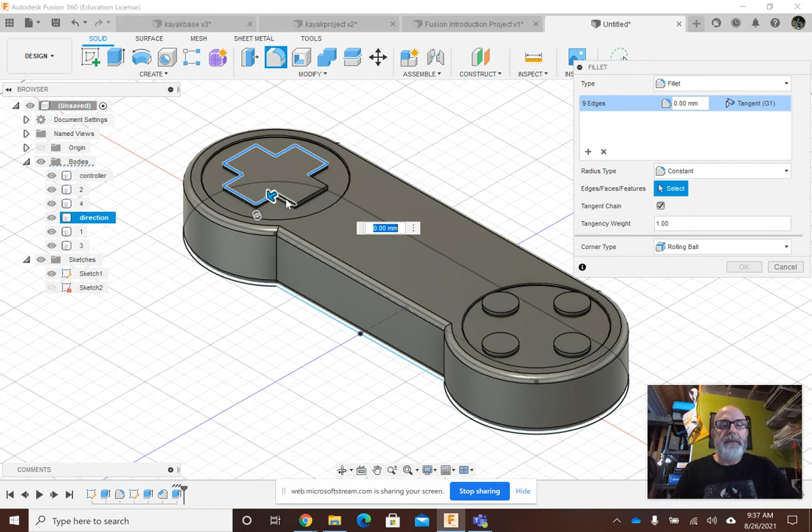Brings up my fillet palette, and the active section is to select the edges that I want to apply the fillet to. So notice there's a bottom and top edge. I want the top edges of this button. So that's what I want to select. We need to be precise here. Click, click, click. Missed one. Click, click, click. Top. Make sure you're at the top. Click. All right, so I got that button selected.

Let's go over here and get these, they will be easier. Click, click, click, click. I can do both sides because they're all going to receive the same fillet of 1.5 millimeters. So let's type in 1.5 in our dimension box. It projects out what the fillet will look like. Yep, there's our rounded edges on them. Looks good. Click OK. The fillets are applied.

Last thing we have to do is to create our AB buttons here in the middle, and we'll be done. So we're going to create a sketch on the top surface of our design, and we'll add those buttons. So let's go over here, create sketch. Now, before I get there, the thing I want you to notice real quick, look down at our timeline. All of our steps are being recorded, and we can go back and access those steps at any point in time if we need to change something. Our designs are flexible, dynamic, and we can go make modifications if we need to.

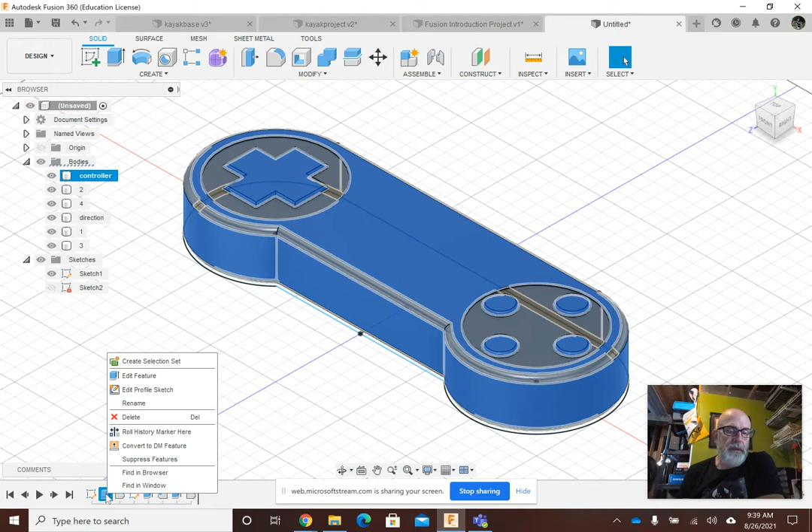All right. So if I wanted to go back and change the height that I extruded the initial body, I can go back on the initial extrude, right click, or you can double click on it, edit feature, and I could change it from 38 millimeters to 50. Click OK. My design adapts to that change. Okay. Makes our design very flexible. Let's go back and change it back to 38. Right click, edit feature, 38 millimeters. Okay, just wanted to point that out.

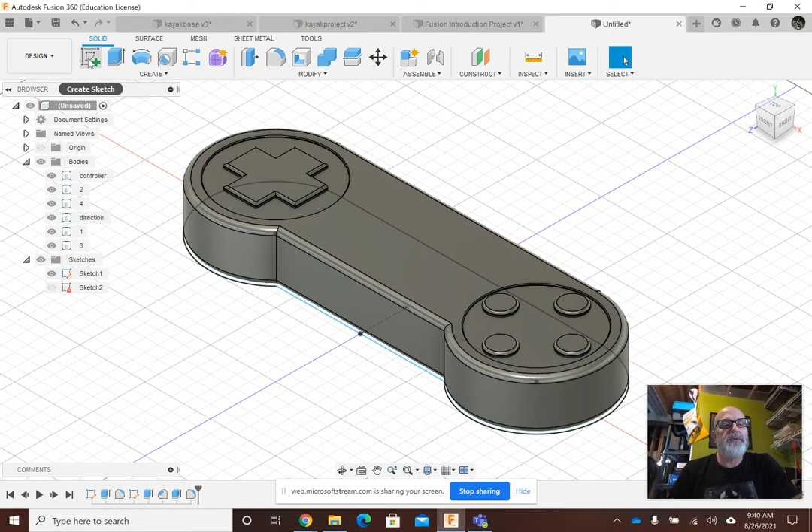The timeline is a tool that we will use a great deal in this class. Don't be confused when I say go to the timeline. All right, what were we doing? Oh, we're going to create a sketch on our top surface and put our AB buttons in. Create sketch. Remember, don't overlap with one of the planes. So I'm going to click up here, click, and there we are.

Now, the first thing we have to do, and I'm going to move mine over so it's visible, is we need to position where our AB buttons are going to be. And it's going to be based on the origin here, the center of our design. Escape out of my hand tool. So I'm going to draw a center rectangle because I want my buttons to be 25 millimeters down. And was it 25? No. I want it to be 12.5 millimeters down and 12.5 millimeters over.

So I'm going to draw a center rectangle. I'm going to turn construction on, from the origin. Click. I'm going to draw a 25, tab, by 25 millimeter square from the origin and hit enter. So it's 25 millimeters from here to here, which means it's 12.5 millimeters from the origin to the bottom line and another 12.5 over that direction. So these two lower corners represent where I want my A, B buttons to be.

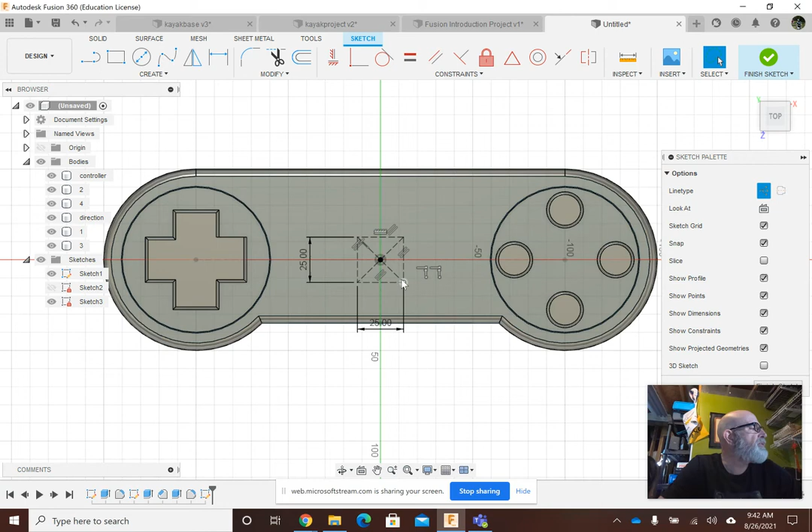And to draw these buttons, because they're kind of an oval shape, they're not circles, I'm going to use the ellipse tool. Okay, the ellipse tool is 3 clicks and it has 3 dimensions: the height of the ellipse or the length, the width of the ellipse, and the degrees in which it's being drawn at. Is it going to be straight up 90 degrees or is it going to be slanted over one direction or another?

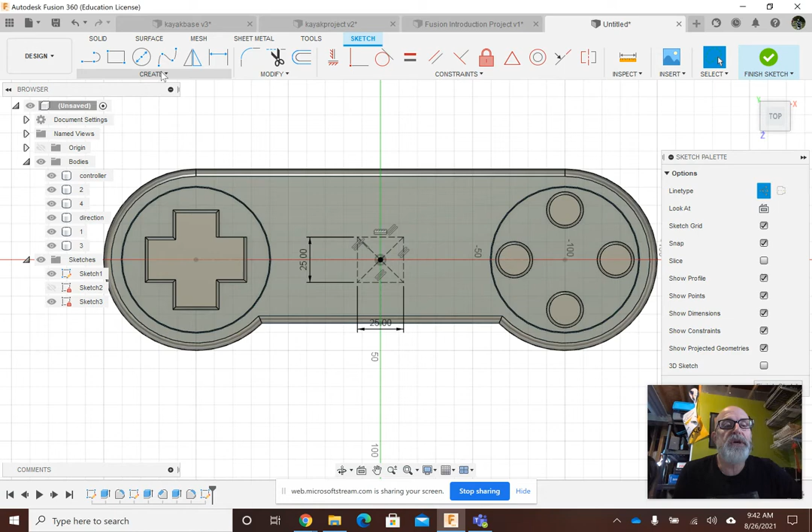So I'm in the sketch mode. Notice I'm back to the sketch menu. Create ellipse. Okay, ellipse. Click. I'm going to zoom in, make it easier to see here. I'm going to come down to this bottom corner. This is my first click on the ellipse. Click. I'm going to drag up.

I want my ellipse to be 20 millimeters long. I'm going to hit the tab key and I want it to be at 100 degrees. All right, so I've set those.

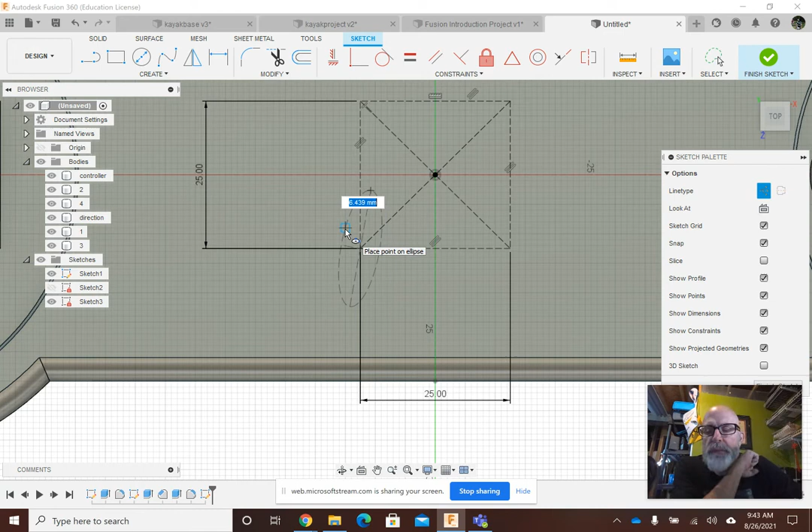Click again, now drag left. Notice how my ellipse starts to form. I've got a problem though - I didn't turn off construction and I want this to be part of my design. But I can fix it.

Let's go ahead and put our ellipse in at 8 millimeters wide and hit enter. So there's my ellipse, but it's construction, so it's not an enclosed shape. It won't enclose for me.

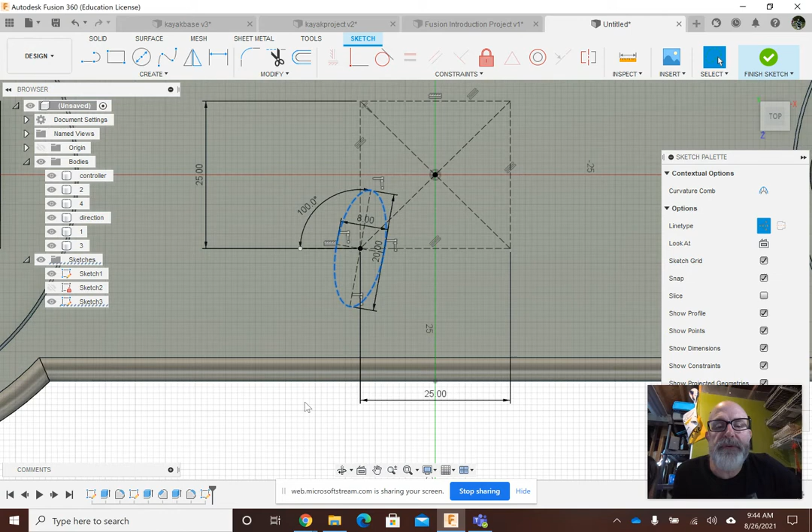Let's select the line. Notice how it turns blue when I click on it - it's selected. Let's go over to my line type and deselect construction. Now it's no longer construction.

Let's turn it back on because I want to show you another way of turning it on and off. Select the line, hit the X key on your keyboard - it deselects construction.

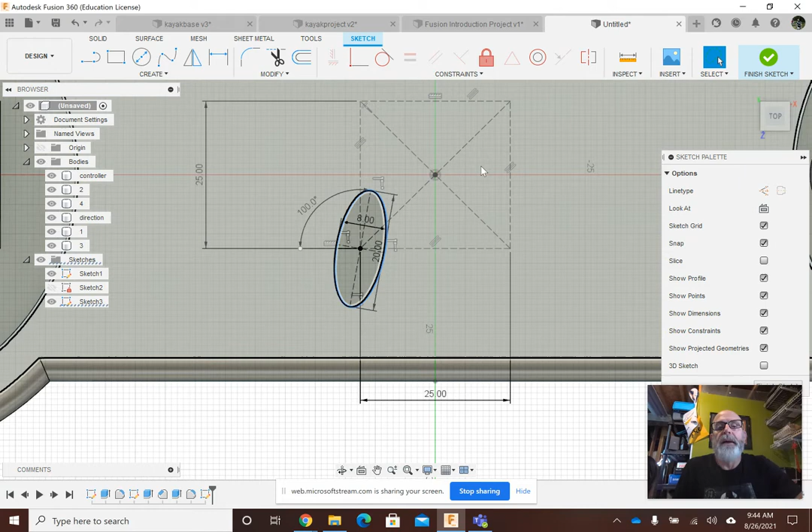Now, I could draw this again from this corner, or I could use the mirror tool to create an identical ellipse on the other side of the axis. I have multiple options in how to do this.

We'll just draw the ellipse again. I've got construction off, good. What I'm trying to demonstrate by saying that is there are multiple ways of doing the same thing. I'll tell you what, let's do the mirror tool.

All right, let's go mirror. Object selected, there we go. I already had that highlighted, so click on it. Select your ellipse, the mirror line - what line do I want to project it on the other side of? Oh, it's not going to let me select the axis, so I have to draw a mirror line.

Let's cancel, let's go to my line tool. Make sure construction's on. Start at the origin, come right down the y-axis. That's good, there's my mirror line. Escape out of the line tool.

Let's go back to mirror. Select your ellipse as the object to be mirrored, and my mirror line - it's going to project it on the other side of this mirror line. There it is, select it. No, that's not right, I want it tilted the other way. Cancel, not going to work.

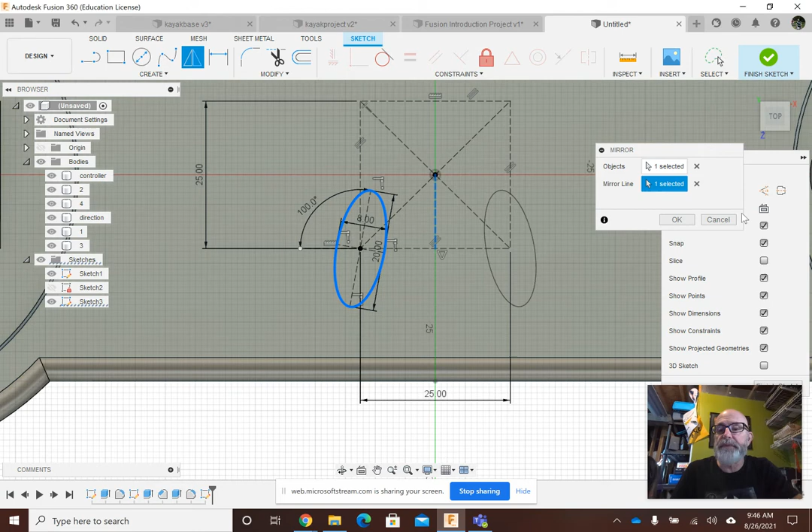All right, it's worth a shot - I hadn't tested that beforehand, obviously. So let's go to our ellipse tool. Let's go to the bottom corner here. Click, start to go up 20 millimeters on my length, tab 100 degrees. Click again, 8 millimeters.

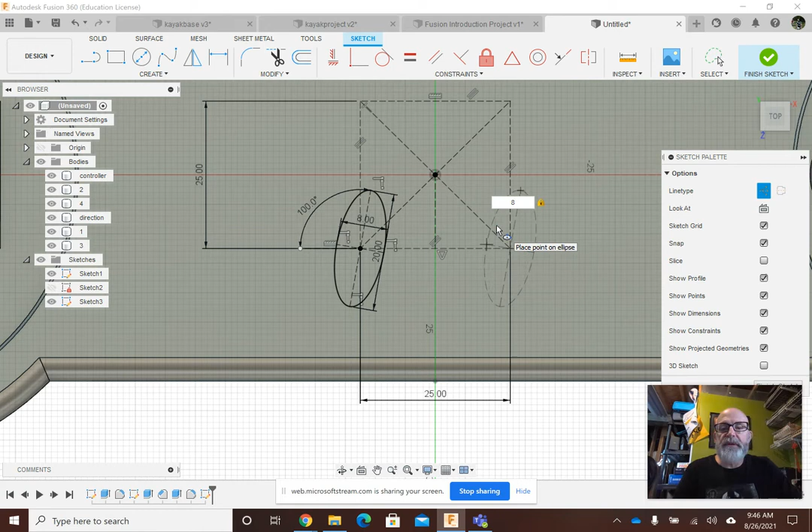I did it again, I still got construction on. Hit enter. Select your line, turn off construction, there we go. So now I have two enclosed buttons there.

All right, so what we're going to do is extrude those buttons 2.5 millimeters. And then we will rename them A and B, and we'll add a fillet of 2.5 millimeters to them and we'll be done.

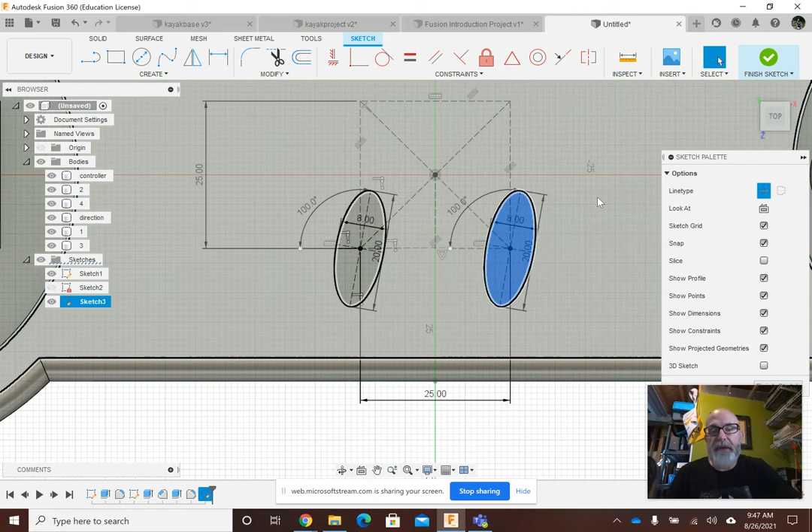So, finish sketch. Hit the E key to extrude. Let's select our two buttons, there we go. Extrude them 2.5 millimeters.

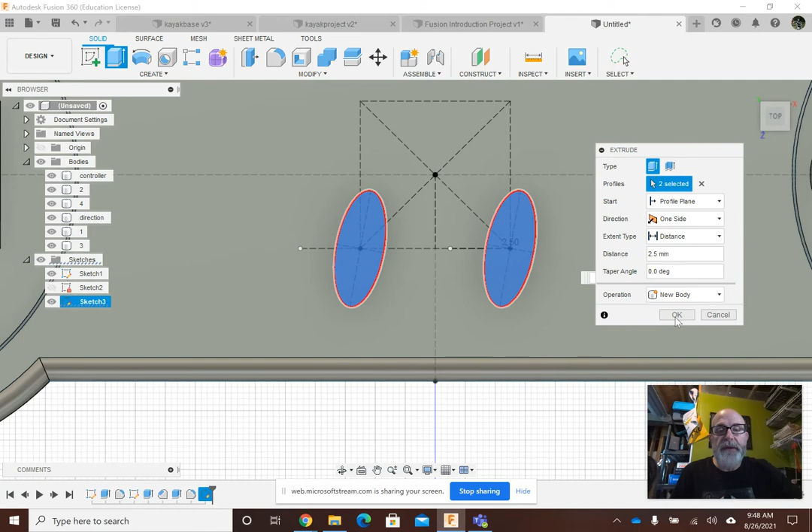New body is the operation. Click OK. Let's go to the home key, and my two buttons are now extruded up. They got some pretty harsh edges on them.

Body 7 - notice how I hover over body 7, that's the left button. Click, click again, let's make it button A. Enter. Body 8, click again - B. All right, so I've got all my buttons renamed.

Now I'm going to fillet the two top edges and we're done except for the appearance. So let's go to fillet. Let's select the edge here and the edge here. And we want these really rounded, okay? So we're going to go with a full 2.5 millimeter.

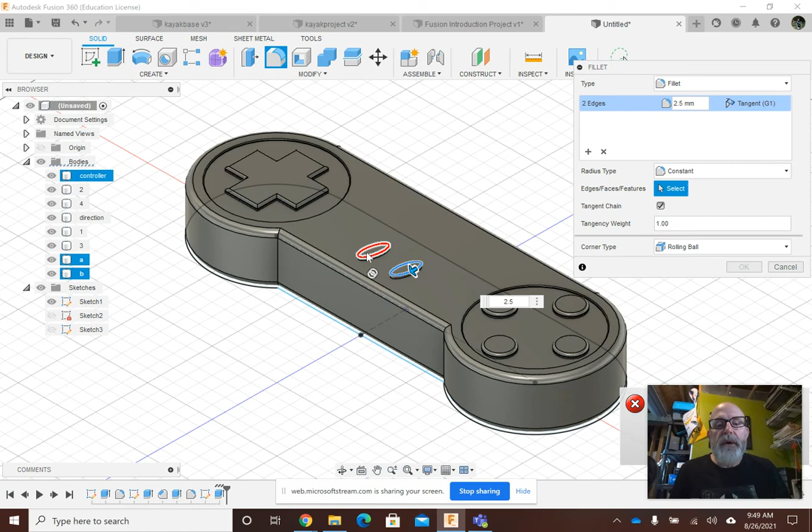Oh, it's got an error there. Okay, 2 millimeters, not 2.5. Click OK. That was too much in the way of a fillet for the height - it wasn't going to allow me to do that.

All right, now the last thing we're going to do is the appearance. We're going to change the appearance of each button. Let's start with the controller. So let's click on controller over here.

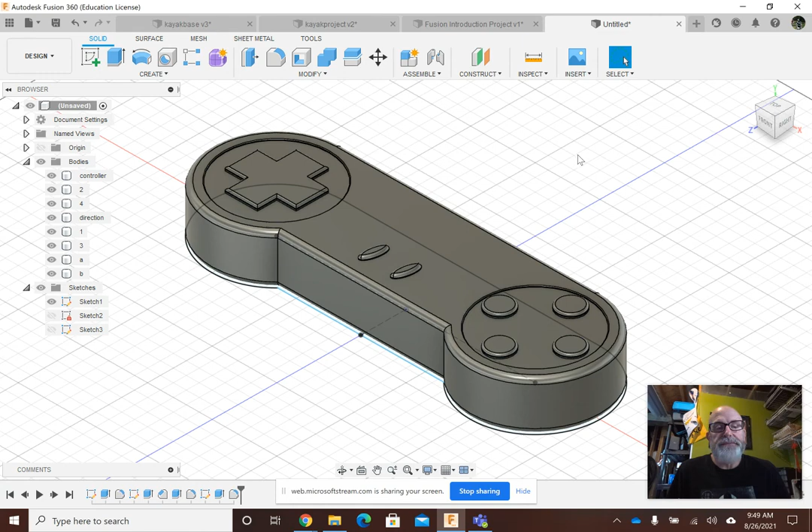And let's right click on controller and appearance. All right, we get the appearance palette up here.

Scroll up and down - I want you to go to plastics. Click on the plastic folder to expand. It may take a moment because you may have to download some of these items, okay? Everything that's up I've used. I'm just going to start with the ABS white.

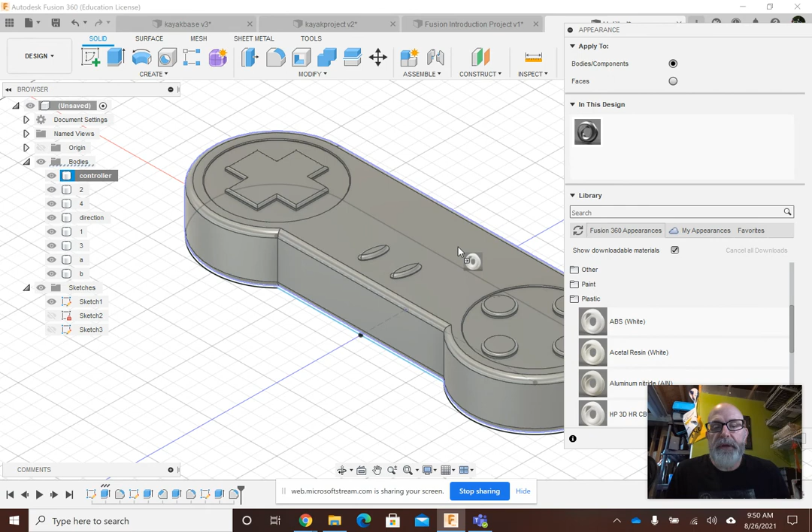I'm going to click and drag it over and drop it on the face of my controller. It made it white - I don't really want it white. So I'm going up here - notice how it added ABS white to this design. I'm going to double click on it. I'm going to change it to a light gray.